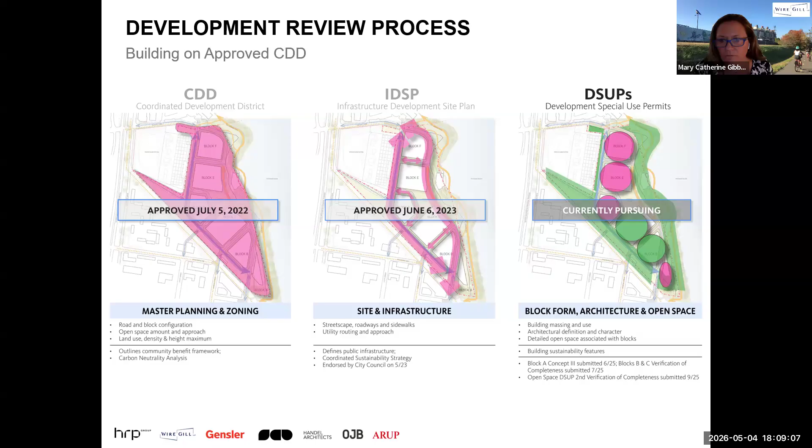The CDD concept plan created a framework for the redevelopment while preserving a certain level of flexibility and requiring certain on-site public improvements to be delivered depending on the phasing of the redevelopment. The CDD identified what comes with which — what we used to call phases, but we now group by blocks — particularly what open space comes with which block.

HRP is applying the CDD framework in the first blocks of this development. They're proposing to build the first 2 blocks, blocks B and C, and the open spaces — the waterfront open space and the rail corridor open space — tied to those blocks. The remainder of the development will come later. Now I'm going to turn this over to Melissa Schrock of the HRP Group.

Thanks, Mary Catherine. Good evening, everybody. We're so excited that so many of our neighbors have joined us this evening to get the update. I'm Melissa Schrock, and I lead the mixed-use development team at HRP.

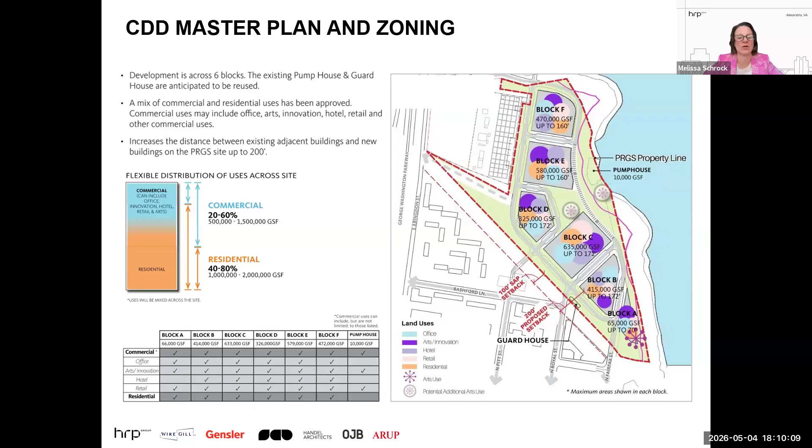Corey, you can go to the next slide, please. As many of you may know, HRP specializes in remediating and reinvigorating former industrial sites across the country, like this one here in Alexandria. PRGS is actually the 5th coal-fired power plant that we will remediate, deconstruct, and transform. At PRGS, we'll be transforming the site into a welcoming waterfront district with a dynamic mix of uses that include housing and commercial, retail, arts and cultural space, pedestrian and bicycle connections, and significant open space for the community to enjoy.

During our CDD phase, as Mary Catherine just reviewed, we developed 4 guiding principles for this project through many conversations with community members, city staff, and local leaders. Those principles are: integrate the site, re-knitting it into the existing urban fabric of Alexandria; connect people to the waterfront, removing the barrier that the power plant has been in this section of the waterfront for so many years; provide meaningful open space, which you'll hear a lot about this evening; and create a sustainable new place, which we'll touch on as well. Next, please.

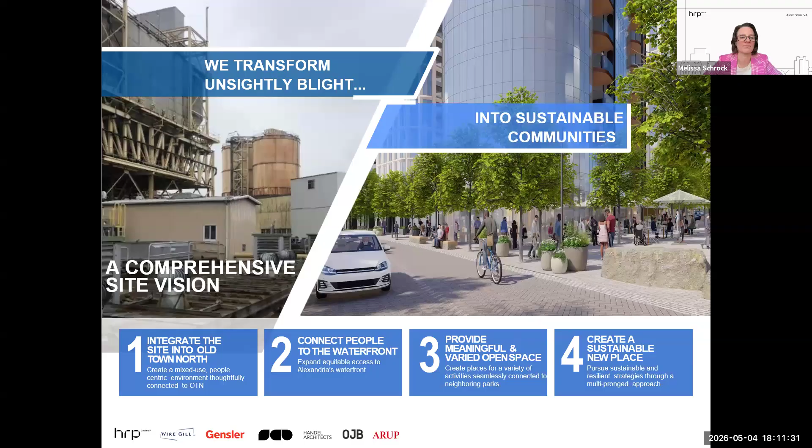HRP is really grateful for the years of advocacy from the community that led to the shuttering of the power plant, allowing us to acquire it with a vision to transform it from a fossil fuel-based facility into a sustainable new district. As documented in our approved Coordinated Sustainability Strategy, or CSS, which was the first of its kind in the city, the project will include important resiliency improvements for stormwater management and on-site energy generation, as well as the creation of a significant number of construction and permanent jobs. Next.

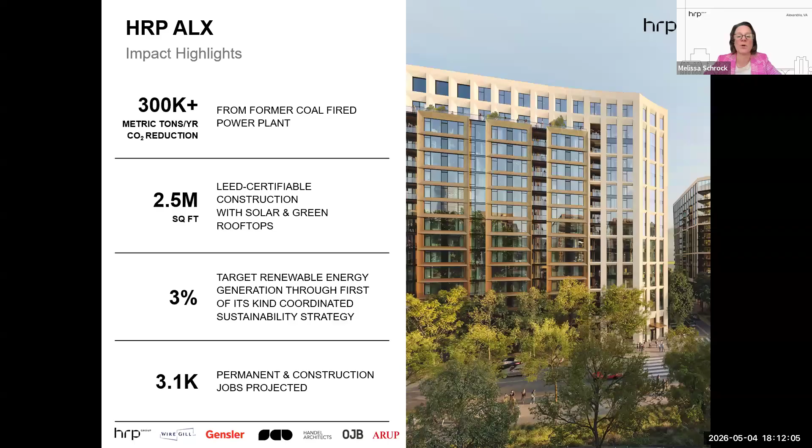Additionally, this project is unique, both in terms of some of the challenges of redeveloping a site like this, as well as the public benefits it's able to deliver. We'll be undertaking the abatement and deconstruction of the plant itself and environmental remediation of the site to enable redevelopment, and that's going to start as soon as next year.

Significant affordable housing units will be provided on site. Over 10 acres of public open space will be created or improved. And of course, new roadway, utility, bicycle, pedestrian, and bus infrastructure will be built as part of the project. Over a period of about 30 years, the project is anticipated to generate about $770 million in new tax revenue for the city. And all told, this project represents about a $2 billion private investment into the site.

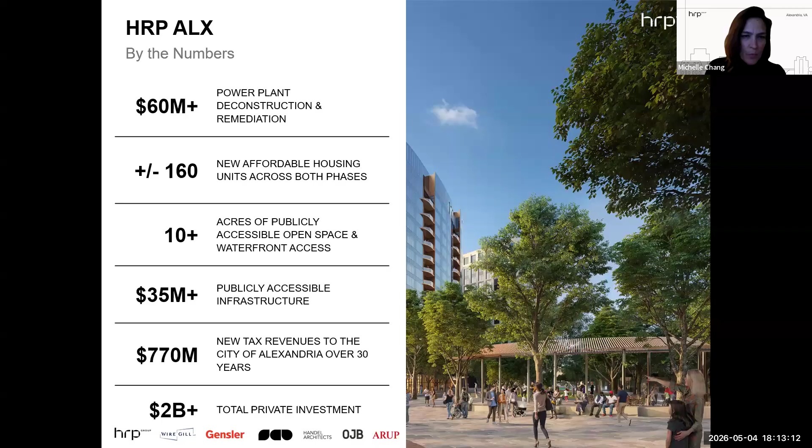HRP's approach for incorporating affordable housing across this redevelopment is delivered through three key components. The first are the set-aside units, which ensure the affordable units are incorporated across residential buildings throughout the new development. Secondarily, a voluntary contribution, which ranges based on the product mix across the site, a range of 8 to 11 million in 2022 dollars. This will be paid by block and will help fund affordable housing initiatives, which includes our third key component, a unique, dedicated affordable housing building that will be developed using an innovative public-private partnership approach with the city and a future affordable housing partner.

This will be constructed in phase 2 and leverage multiple affordable housing financing sources. HRP is proud to create housing opportunities for individuals and families across a range of income levels as part of this transformational redevelopment.

Next slide. Building on the rich culture of Old Town and Old Town North neighborhoods, the project will establish a vibrant arts and cultural district that celebrates both the history and future of these neighborhoods in multiple ways. First, through the creation of 30,000 square feet of dedicated cultural space, half of which will be subsidized through the Arts Bonus Density Program. Second, the new district will be the northern terminus of the Arts and Cultural Corridor that extends from the Torpedo Factory and links Old Town and Old Town North.

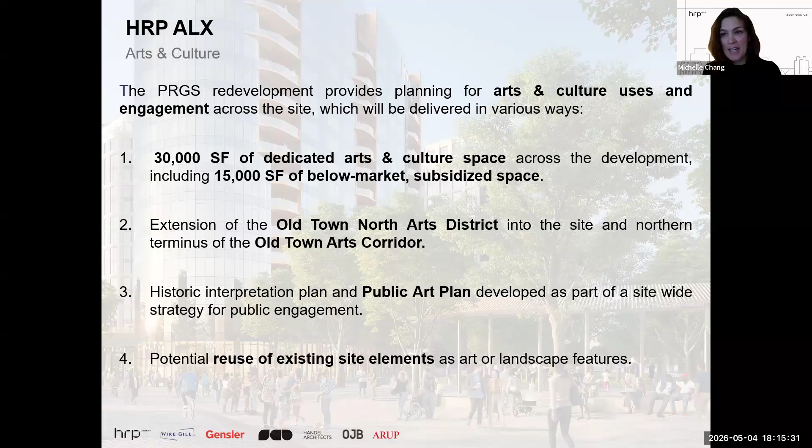We are so fortunate to be working with a world-class design team. Our architects, Gensler, Handel, and SCB, along with our landscape architect, OJB, are collaborating closely to bring this vision to life with the highest standards of design and placemaking. You'll hear directly from several members of the design team tonight, and we also have additional consultants on the call who can help and answer any questions that might come up.

As mentioned earlier, we have submitted 4 development special use permits for the first phase of the project: blocks B and C and the waterfront and rail corridor open spaces. These applications are scheduled to go before the Planning Commission and City Council in June.

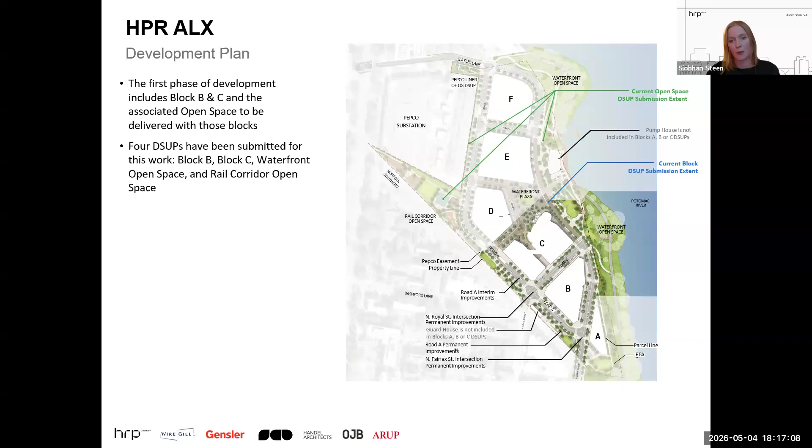This site will be developed from south to north, beginning with blocks B and C. Throughout the DSUP process, we've continued to refine the phasing plan in coordination with city staff. As shown here, each development block will be delivered together with its open space adjacent, ensuring that public amenities come online as the neighborhood grows.

Zooming in on this first phase, blocks B and C are located at the southern end of the site closest to Old Town North. In this image, the Potomac River is at the top of the frame, and the waterfront open space creates a continuous landscape from the river's edge and the Mount Vernon Trail, connecting to the new streets and sidewalks on site. Access to these blocks will be provided through the extension of North Fairfax Street into the site, along with the new Road A, which runs from this intersection at North Fairfax all the way to Slater's Lane.

Blocks B and C are mixed-use sites. Each parcel includes an active ground floor retail, a for-sale condominium building, and a rental apartment building. You'll be hearing more shortly about the architectural and landscape design for each of these components. Next, please.

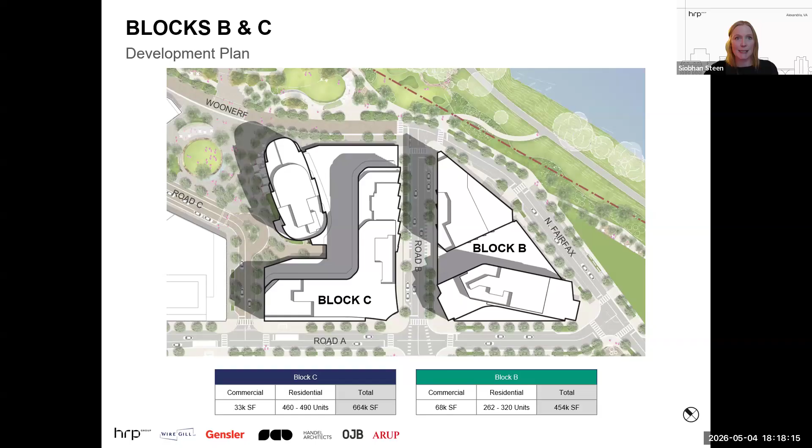In addition to our commitment to high-quality design, the CDD Master Plan established Alexandria's first coordinated sustainability strategy, or CSS. This strategy outlines a series of green features that will be incorporated throughout the site, including a minimum LEED Silver certification for all buildings, on-site renewable energy through rooftop solar panels, water conservation measures such as low-flow fixtures, and full electrification of all building mechanical systems. These commitments reflect HRP's dedication to environmental stewardship and long-term resilience.

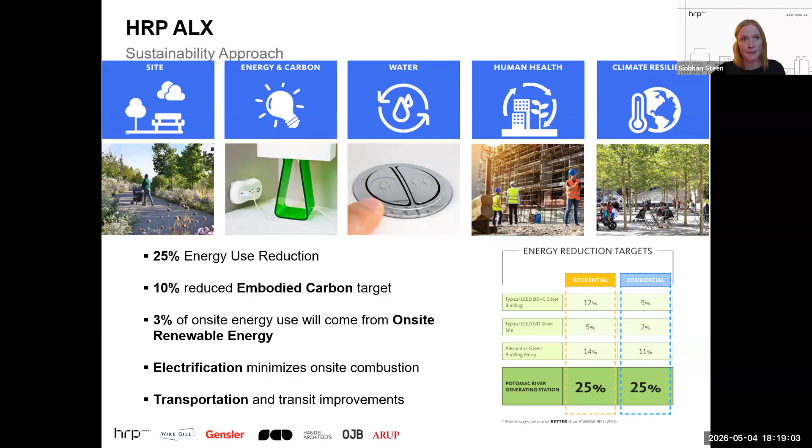Thanks, Siobhan. Good evening, everyone, and thank you for being here tonight. My name is Simon Beer. I'm a landscape architect working on the Potomac River Generating Station project here in Alexandria.

Tonight, I want to walk you through what I believe is the most exciting component of the entire project, and that's the open space. What we are proposing here is not just a collection of open space, it's really an integrated network of green spaces, trails, public amenities that will fundamentally reconnect Old Town North to the Potomac River.

We're going to be covering the overall open space vision and walk you through the waterfront plan from south to north, and then move into the rail corridor open space and touch on our historic interpretation and art strategies before we wrap up. Next slide.

So to put this into context, we will start with the big picture, and this slide shows the open space network that we are proposing along with existing parks Alexandria residents already know and love. The PRGS project will contribute approximately 11 acres of combined open space, some of that being off-site and some on-site. And when you compare that to parks like Founders Park at 4.8 or Oronoco at 5.6, you can start to appreciate the scale of what we're talking about here.

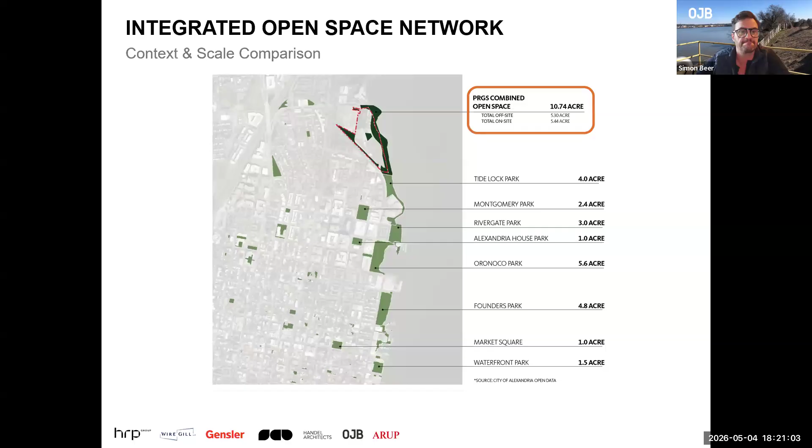Our team has been working collaboratively with the National Park Service to ensure that we are designing this as a natural extension of that landscape with no jarring transitions or hard edges. So the goal from a landscape architecture standpoint is to create a green connection along the perimeter of the development, something that will orient people, provide ecological value through native plantings and stormwater management, and gives the community a real genuine sense of place. Next slide.

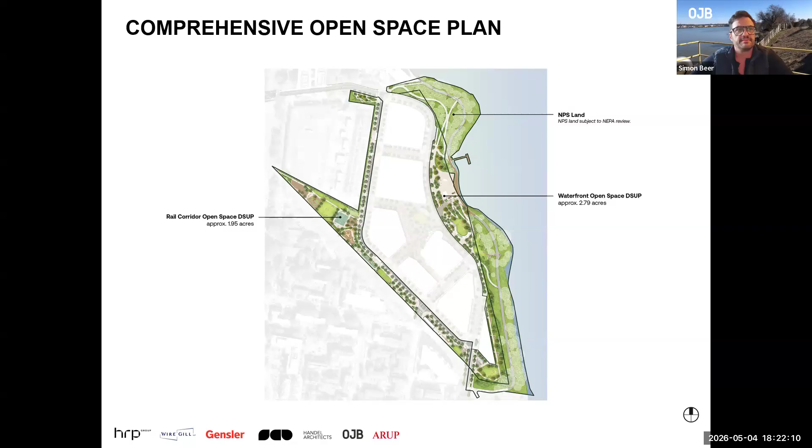So the waterfront open space is organized into 3 zones, a north, central, and south waterfront. And each has their own character and program. This was an important design strategy for us. Rather than one undifferentiated park experience, we're creating a sequence, a landscape journey, where each zone offers something distinct as you move along the water's edge. When you think of a good urban street, it has rhythm, it has variety, moments of energy, and moments of calm. That's what we're thinking about for the waterfront park along the Potomac. Next slide.

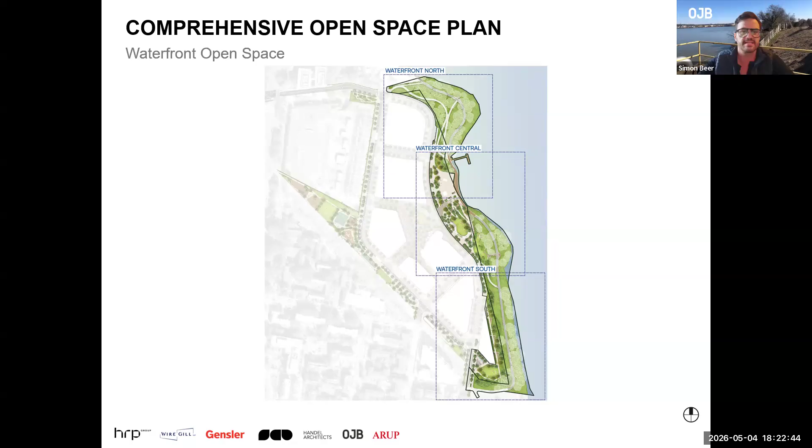So starting at the south of the waterfront, this is an entry point to experience from the south end of the site. The features include a generous pedestrian walkway along the water. Alongside that, an event lawn that can host movies. There's also a water feature that serves as a welcoming landmark, integrated seating throughout the landscape, and connections to the Mount Vernon Trail, which is one of the most heavily used multi-use trails in the entire region. From an urban design perspective, that is about creating a memorable front door to the waterfront and a kind of civic open space that invites people to linger and enjoy the space. Next slide.

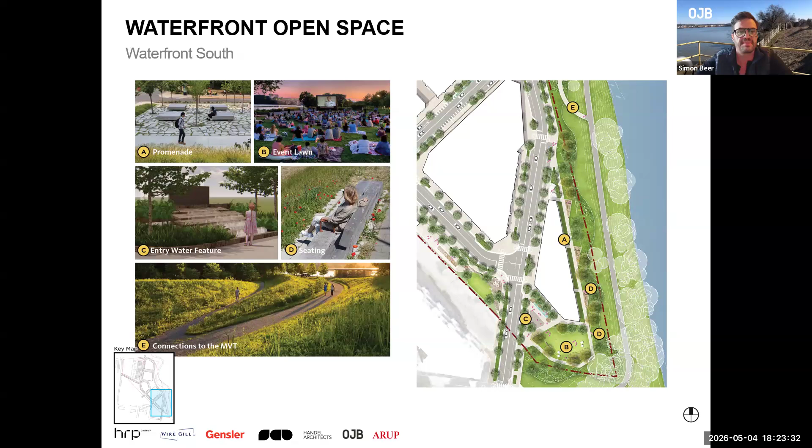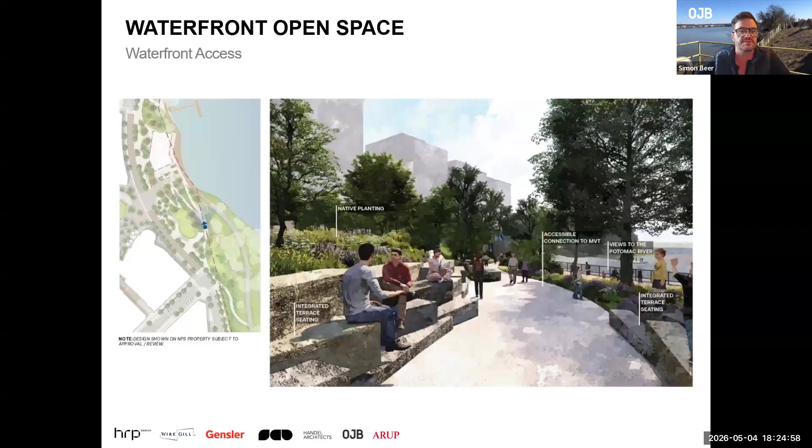Next slide. The central waterfront is the heart of the waterfront experience. This zone includes six key program elements, including the Mount Vernon Trail bridge replacement, pump house, public viewpoint, native gardens, an accessible walkway down to the water, a shade structure with swings, and the Great Lawn.

The existing pump house is a historically significant structure on this site, and rather than demolishing it, we are proposing to activate it as a public amenity, a viewpoint with potential for food and retail, also along this water's edge. So this adaptive reuse at its best is honoring the industrial heritage of the site, while also giving it new life. Next slide.

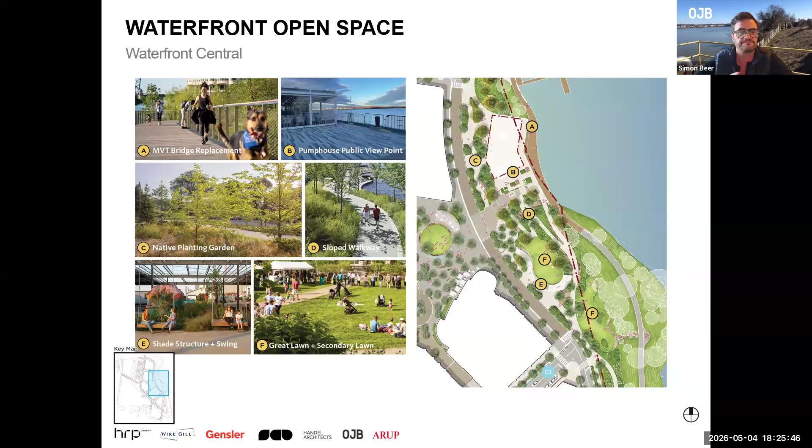The Great Lawn is the centerpiece of the central waterfront. When you look at this rendering, I want you to imagine on a Saturday, families, dogs, cyclists coming off the Mount Vernon Trail, food vendors, perhaps a concert on the raised stage. This is the kind of activated public space that defines these great waterfronts.

The design includes flexible seating, the stage and overlook, and swings. These elements are both functional and playful. The lawn itself is sized to accommodate a large community event while remaining intimate enough for everyday use. And of course, views out to the Potomac are preserved throughout. Next slide.

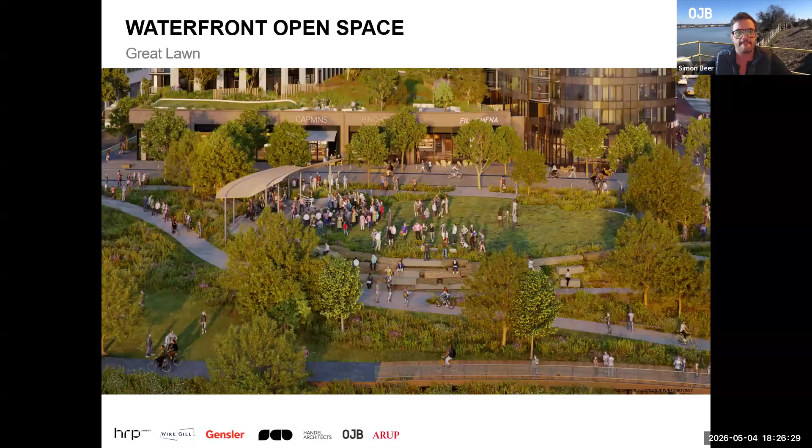Here you can see the shade structure in a little bit more detail, a contemporary canopy that provides shelter and a gathering spot adjacent to the Great Lawn.

The stone block terraces along the water's edge frame views and create additional informal seating zones. These kind of structures are really critical in public open space. Shade and shelter extend the usability of that outdoor space throughout the year and create a more comfortable destination rather than just a place to pass through.

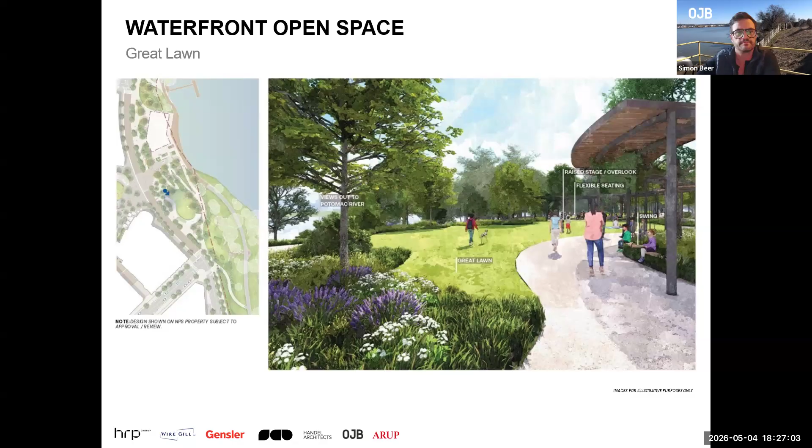Next slide. Accessibility is a core value of this project and certainly not an afterthought. The idea of the accessible pathway adjacent here, and the idea of the kind of informal shade structure that we are sitting next to, you can start to see the idea of the stone blocks as well. These kind of integrations are incredibly important.

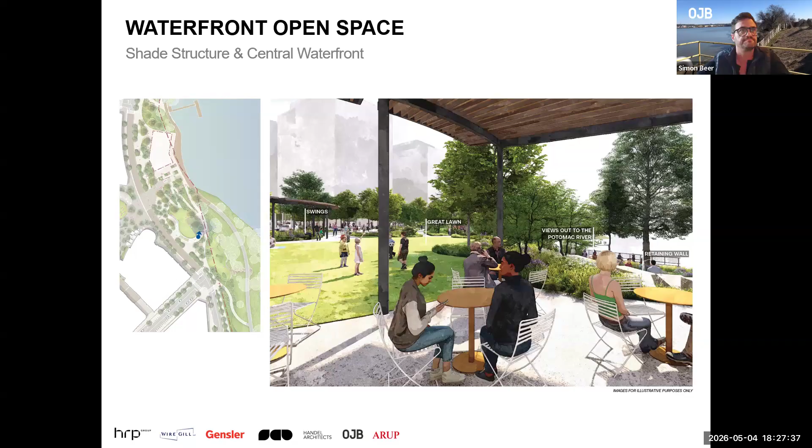Next slide. You can see this native planting along the pathway, that accessible connection to the Mount Vernon Trail, the integrated seating that works for everyone. Good design here makes accessibility invisible and just integrates it right in. And so that's really the intent here.

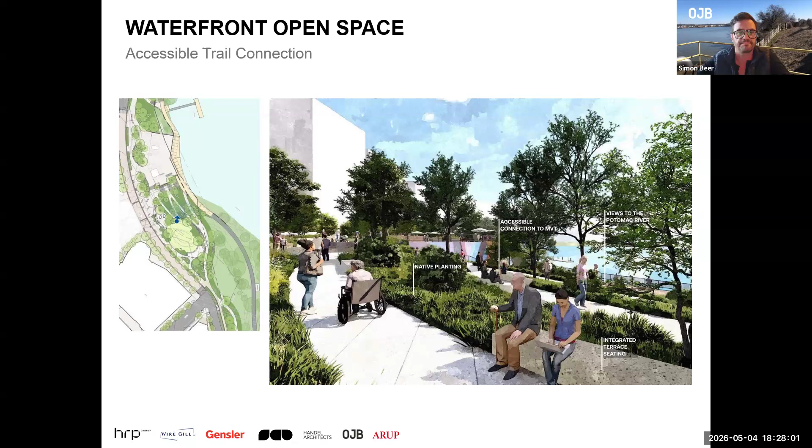Next slide. The Pump House Trail connection is a dynamic moment for the waterfront sequence. A cascading stair flanked by rich native planting, a bold mural on the pump house wall, creating a memorable moment.

You can see the design accommodating for both pedestrians on foot and wheelchair users, with the grade transition handled thoughtfully throughout. It's also that opportunity for public art along the architecture and the existing pump house, what would otherwise be a blank space, so adding some rich and public realm art opportunities.

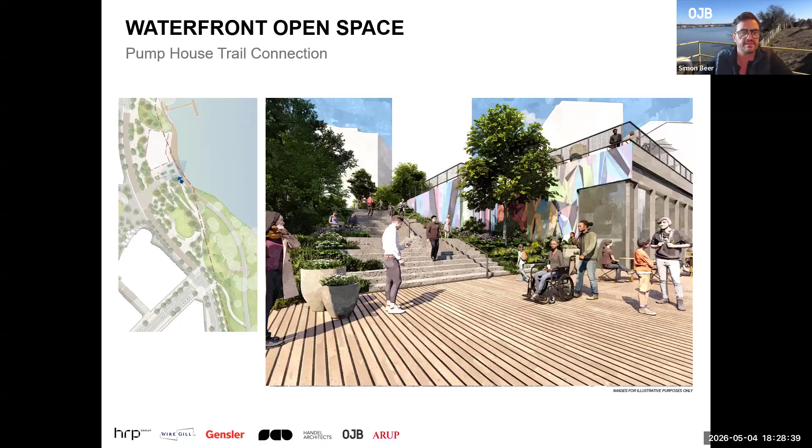Next slide. The Mount Vernon Trail is definitely one of Alexandria's greatest assets, and this project represents a significant opportunity to enhance that. At the pump house, we are proposing a generous expansion of the trail with the boardwalk along the water's edge, outdoor seating, areas for cyclists, and improved connectivity for pedestrians and cyclists.

We're designing this in conjunction with the National Park Service and subject to their approval and review process, but are committed to working collaboratively with them to realize this vision.

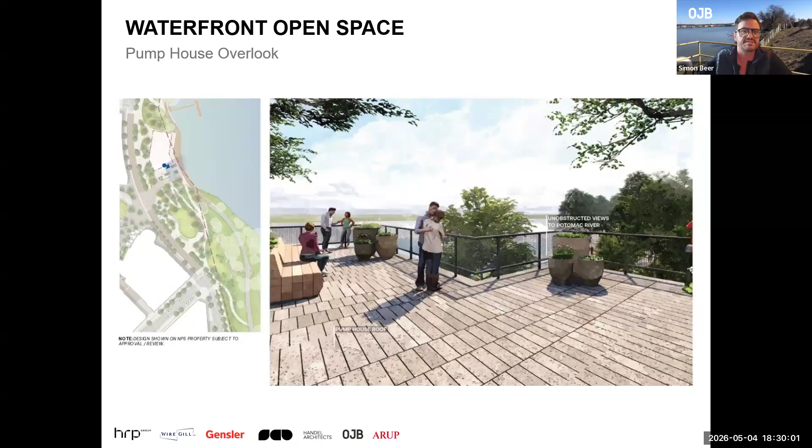Moving to the waterfront north, the character of the landscape shifts a little bit. Here we're in a wooded peninsula of NPS land, and the design takes on more of a naturalistic quality, tree canopy, connections to the Mount Vernon Trail, and something that's really exciting, a personal non-motorized watercraft launch.

That launch itself would open up the Potomac in a new way for Alexandria residents. Just imagine launching your kayak from this site and paddling down to Old Town. That's the kind of amenity that transforms how a community relates back to its waterfront, and a big purpose of this waterfront open space.

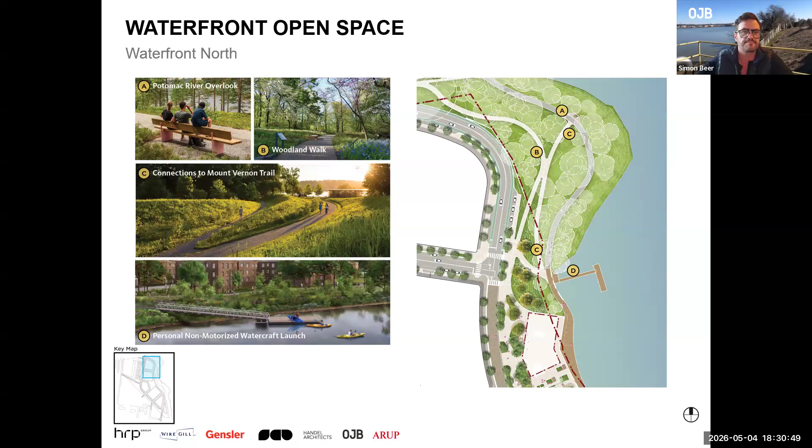This rendering shows the Mount Vernon connection, a minimum of 12-foot wide boardwalk, and a stair that comes down from the development to that personal watercraft launch. The design is clean and functional, prioritizing movement while maintaining water views. This infrastructure investment will pay dividends for decades in terms of how people can access and enjoy that waterfront.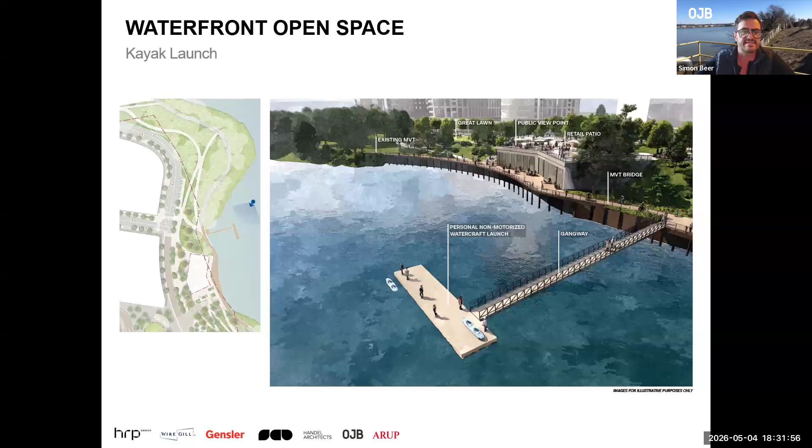So we're going to shift our view to the other major open space system, the rail corridor open space. This linear park runs diagonally through the interior of the site, organized into three zones: north, central, and south, plus a stretch called the Pepco liner adjacent to the existing utility infrastructure.

Rail corridor parks have become a hallmark of thoughtful design in many different places, like the High Line in New York or the Atlanta Beltline. The idea is to take underutilized industrial land and transform it into vibrant, connected open space, and that's exactly what we're doing here.

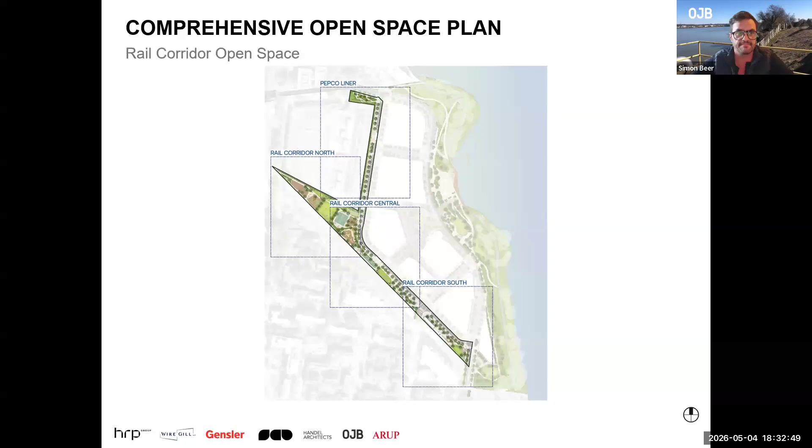So next, we're going to talk about the southern area, and that rail corridor south is the gateway into the rail corridor from the southern end of the site.

Key elements of this include a repurposed guardhouse, an existing piece that's there today, one of the historic structures on this site. It's going to anchor this open space, along with a game court for activities like ping pong and bocce, a flexible lawn for informal recreation, and a gateway plaza that marks the entry into the development. The adaptive reuse of the guardhouse is particularly meaningful, as it's a tangible link to the industrial heritage of the site, while making a great community amenity within this section of the rail corridor park.

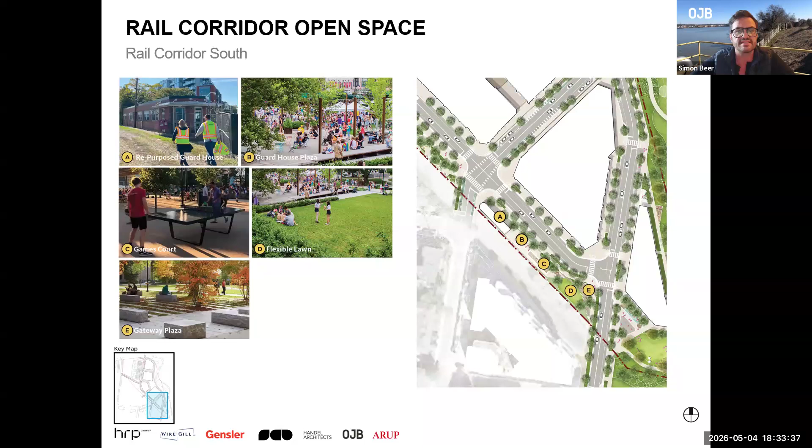So this is really what we're thinking of: placemaking and creating a space with genuine identity, something that has character, that reflects where it came from. The industrial aesthetic of the materials, the art, and the preserved structures all work together to tell the site's story.

The guardhouse plaza takes on a little bit more of an intimate European plaza character, with a canopy of trees, string lights overhead, and movable seating that allows the space to flex for different uses and games. It will really be a great amenity to the community—think of a space that works great on a Tuesday afternoon as well as it does on a Saturday evening. Movable seating is really an important design choice here, allowing people to make the space their own, and that kind of adaptability is really what makes a public space great.

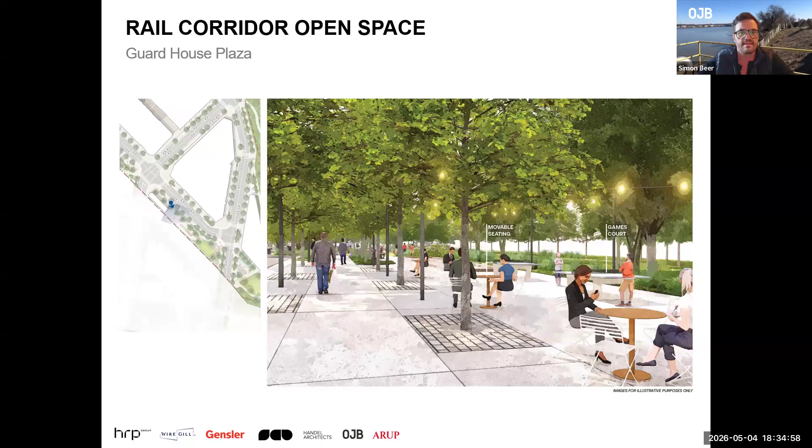The central rail corridor introduces family-oriented programming. Here you have a sensory garden, a passive lawn, and the centerpiece of this zone, the kids' play area, which includes a water feature, a tot lot, and a larger play structure.

In our design process with HRP, we have been talking about design for all ages and all abilities. The sensory garden serves young children with some sensory sensitivities, the passive lawn serves adults and teenagers, and the play areas serve families with kids. When the park works for everyone, it really becomes a true community space.

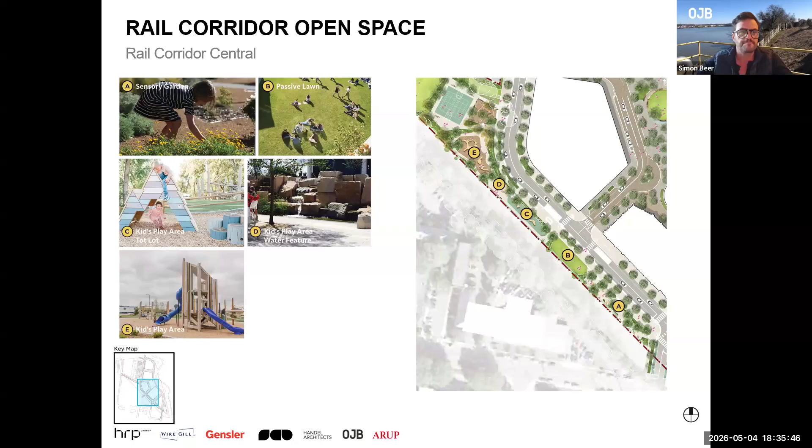The kids' play area is designed to be a genuine destination, not just a standard playground, but something that's engaging, imaginative, and encourages exploration. You can see natural play elements, a water feature with interactive stones, a large play tower beyond with a slide, and even a scooter track.

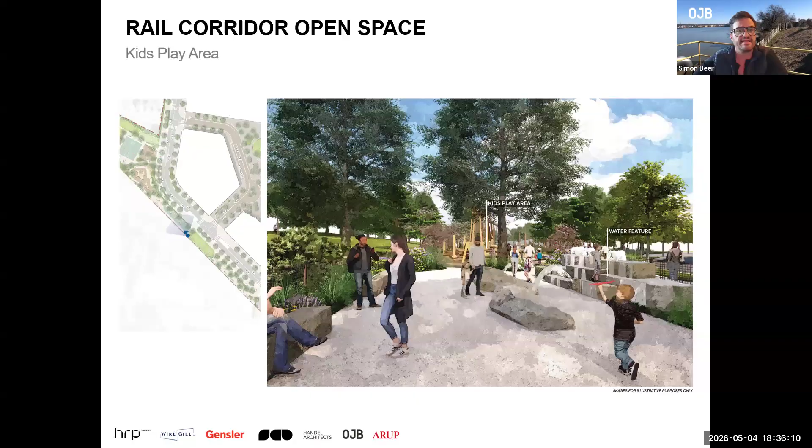The design is going to use natural materials, timber, stone, and gravel, along with safety surfacing that connects kids back to nature within this urban setting. Research is consistently showing us that children benefit immensely from this access to nature-inspired play, and this design delivers on that in accessibility, safety, and excitement.

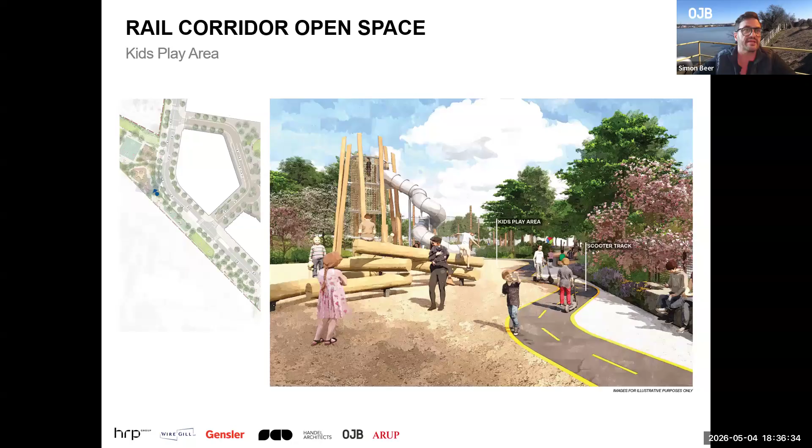The rail corridor north is the most active zone of the rail corridor, designed for sports, fitness, and recreation. The program includes a seating grove, sports courts for basketball and pickleball, fitness stations, a recreation lawn large enough for soccer or other sports, and a dog park.

From an urban planning standpoint, the mix of active uses here within the northern section makes sense, set back from residential portions of the site, while also making this easily accessible to the broader neighborhood. A dog park and sports courts are consistently among the most requested amenities in the community, especially through our community input process, and we've certainly prioritized both here.

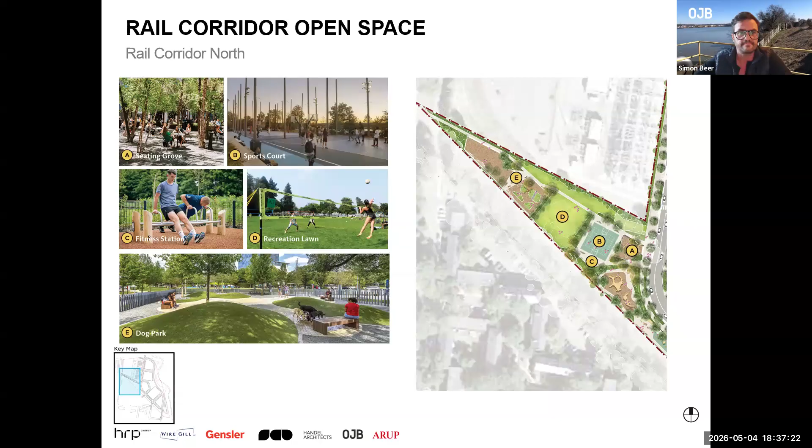The sports court is designed for multi-use. You can see the pickleball lines and basketball lines, allowing it to serve different user groups at different times. We include a generous entry with perimeter netting and tree planting providing shade along the edges. The multi-sports courts are a smart investment for the public space that maximizes the value of the footprint while ensuring the space stays active for all.

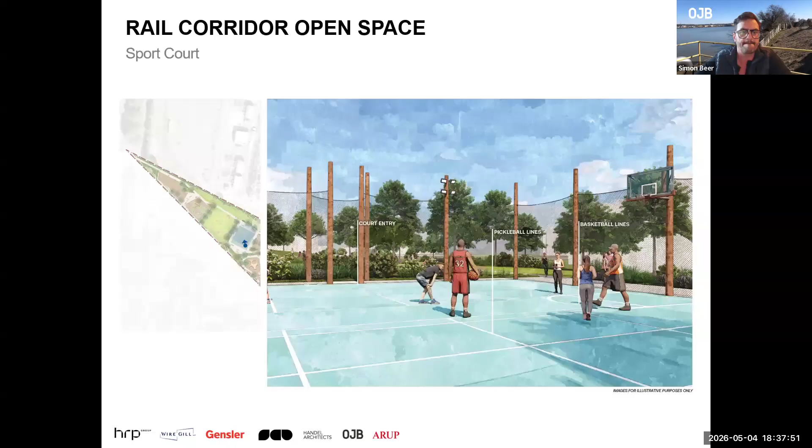The recreational lawn gives you a sense of how all the pieces come together in this rendering. You can see the sports courts to the left, the kids play area in the background, and this open lawn in the foreground with the soccer goal. The tree canopy frames the spaces and creates a sense of enclosure without feeling confined. This is a design technique we've been using, and it's really intentional here along the edge of this field.

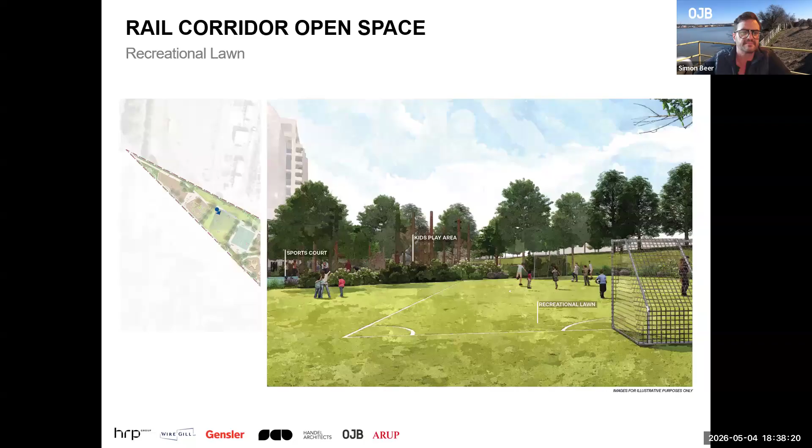The dog park deserves its own mention because it goes well beyond just a regular fenced enclosure. You can see mounds, a dog tunnel, and reclaimed wood climbing features within the confined space. The space is designed both for dogs and their owners, with topography featuring engagement for dogs and additional seating areas along the perimeter for their owners. It's a small detail, but it reflects the broader philosophy of the design team and HRP, where every element of this open space is designed with care and intention, as implemented here within this rendering.

Mentioning the Pepco liner, it's really an open space that runs along this existing utility infrastructure, demonstrating that it can become an opportunity as well. Rather than treating the substation as something to hide, we're using native plantings and artistic screening along this, and also creating a flexible gathering space to the north. The linear strip of green is going to complete an open space loop around the development, ensuring that pedestrians can circulate around the entire site through connected green space. That kind of connectivity is fundamental to the urban design qualities here of the entire development.

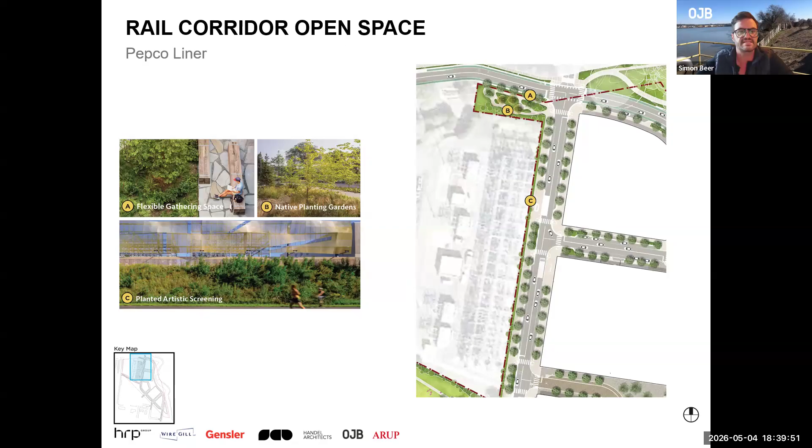Before I close, I wanted to briefly touch on our historic interpretation plan because it fundamentally has shaped how we have approached the design of all the spaces. The site has a rich and complex history, from indigenous occupation before European contact to the founding of Alexandria in 1749. This now industrial area has found abandonment and the growth of invasives that have really marked the beginning of the site's current condition. Good urban design doesn't erase history, it reveals it. Our goal is to embed that story into the site and into the physical fabric of the open space through materials, structures, and art.

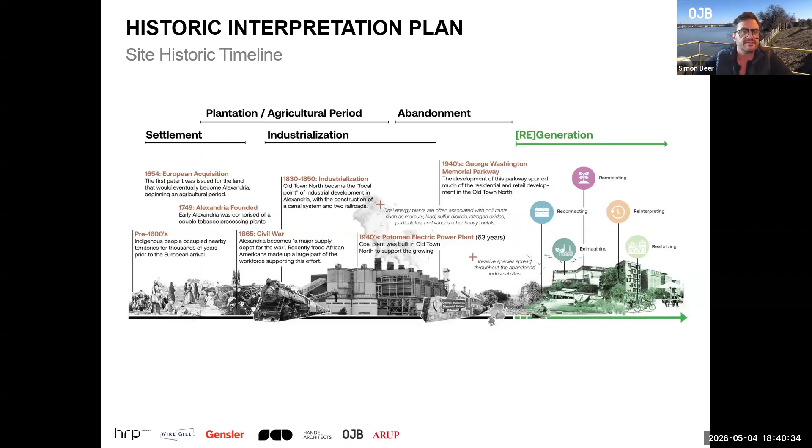Across the site, we have identified specific locations and opportunities for interpretation. That includes repurposing structures like the guardhouse and pump house, educational signage, and the reuse of industrial relics, as well as art pieces throughout, thinking about textures, words, and forms to inform the interpretation of the history here on site.

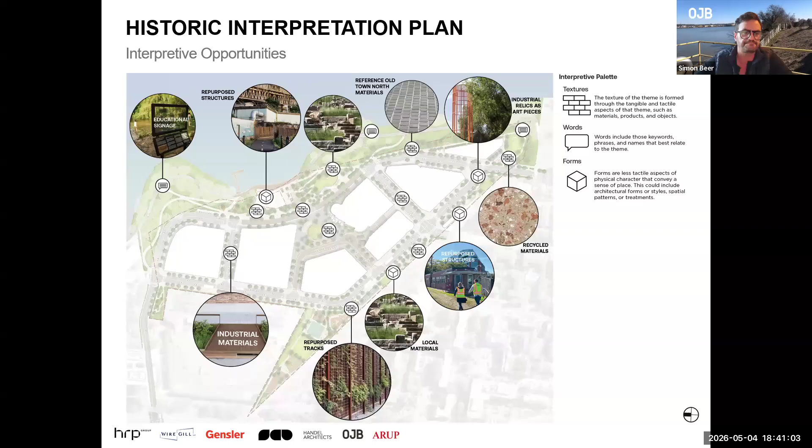Next is the art plan. Public art will be woven throughout the open space at several different locations, reflecting the history and character of the site. This includes things like the Pepco screen, the Central Plaza sculpture, pump house murals, and stone features that reflect the natural setting along the Potomac River. There will be several more meetings on this.

We're treating art not as decoration, but as a civic commitment to Alexandria. It has been such a pleasure to walk through some of these design ideas and thinking with you. And with that, I'll pass it along.

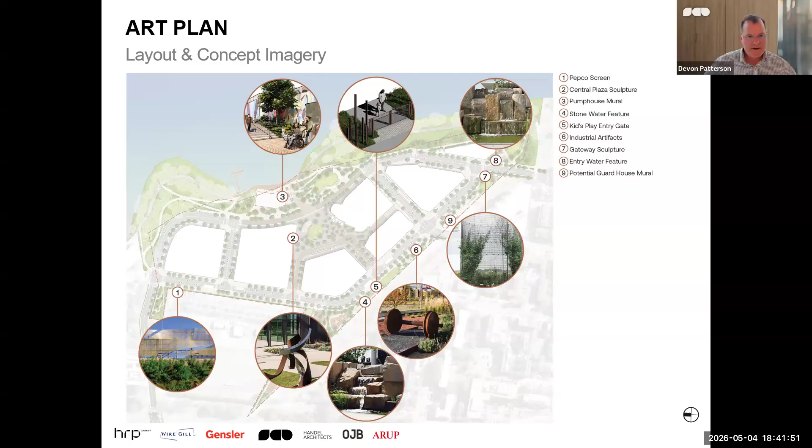We're excited to walk you through the progress on the Block B design, which is a key site shaping the future of the district. Over the past year, our team has been working through phase one of the redevelopment. Block B plays a central role in creating a vibrant, walkable, and welcoming environment for residents, visitors, and the broader community. Block B is designed around strong pedestrian connections and active street edges.

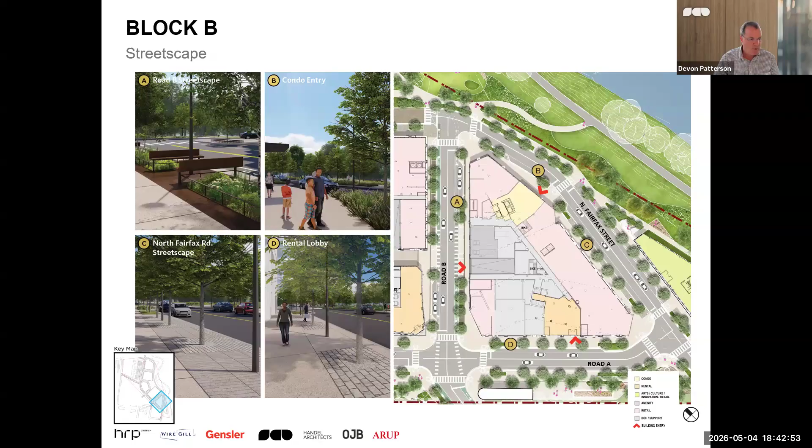Along North Fairfax, the streetscape emphasizes outdoor cafes and connections to the public green space along the Potomac. We've located retail, residential entrances, and public-facing uses to create a lively rhythm similar to what people experience in Old Town on Fairfax. Both Road A and B will serve as key connectors with building entrances and retail placed to support natural pedestrian flow.

At the intersection of North Fairfax and the gateway is the entrance to the district. Block B introduces a signature corner. This area is designed to feel welcoming and recognizable. The retail, storefront signage, and architectural detailing help establish a sense of arrival to this active district.

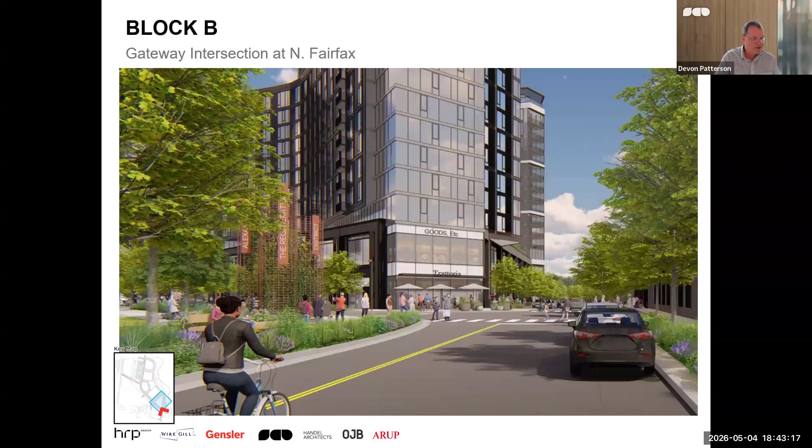Along North Fairfax, Block B includes retail spaces that support diverse neighborhood-serving businesses. The condominium entry and rental lobby are each designed to be visible and provide safe access to the buildings, with thoughtful placement of entries to support foot traffic and enhance the public realm.

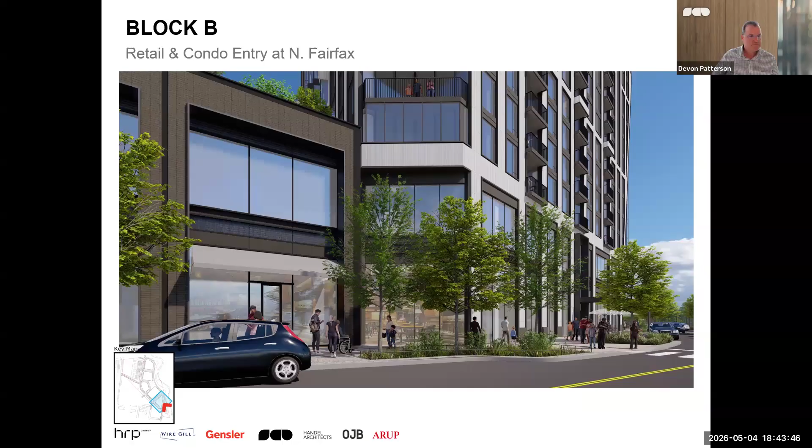As Block B comes to the ground, we've pulled back the elements there to create even more outdoor pedestrian space for the residents of the neighborhood.

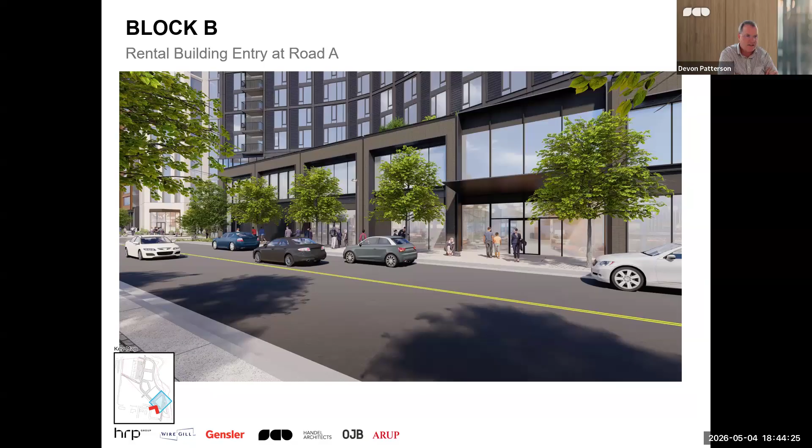This is the entrance to the rental building. From the rail corridor, we've focused on the rental itself and the entrance to the lobby, which is designed to be visible and provide safe access.

Looking at the rental design of Block B from across the rail corridor toward the rental building, this is the south-facing building. We've created variation in facade expression to avoid monotony. Height variety was used to break up the massing of the facade, with the highest point on the right-hand side dropping to the lowest point on the left. This also creates a gateway element where the building meets the ground, forming a strong anchor to both intersections coming into the site. Retail spaces have been proportioned and inspired by Old Town's historic rhythms, with a mix of storefronts enriching the entire street experience.

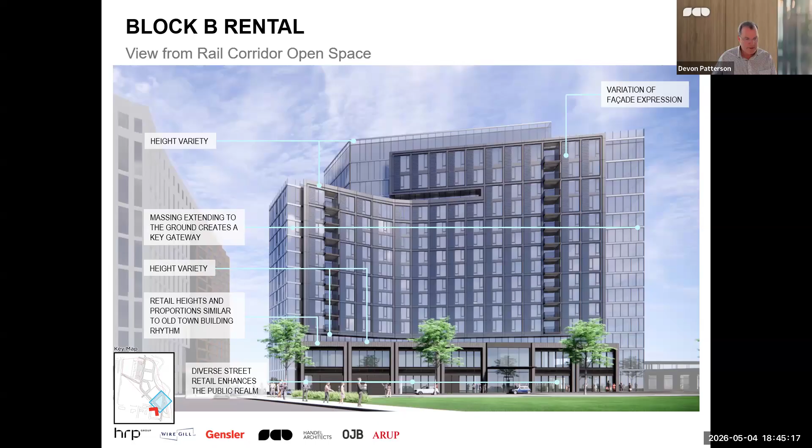Looking at the condo building from the waterfront, the building emphasizes the architectural excitement of the site. We wanted to create a dynamic, iconic sloping building at the corner with a rich material palette and vertical articulation to create height at the corner. We also created height variation for visual interest. The tower sets back and opens up the public realm at the ground floor, improving pedestrian circulation and comfort. The rooftop terrace that drops down from the corner becomes a signature feature and community asset, adding variation to the site. The retail spaces continue the Old Town character along the streets here as well.

In closing, Block B is designed to be a welcoming, walkable, and architecturally distinctive phase one of this district. It blends new development with familiar neighborhood patterns, strengthens public space, and creates opportunities for local businesses and residents. And with that, I turn it over to Blake to talk about Block C.

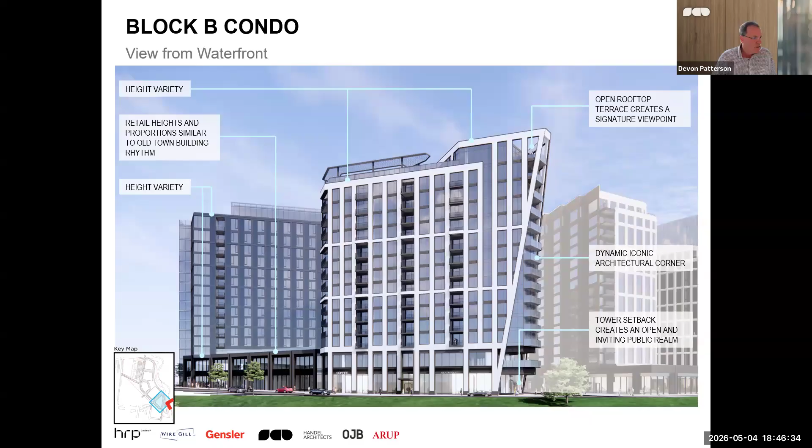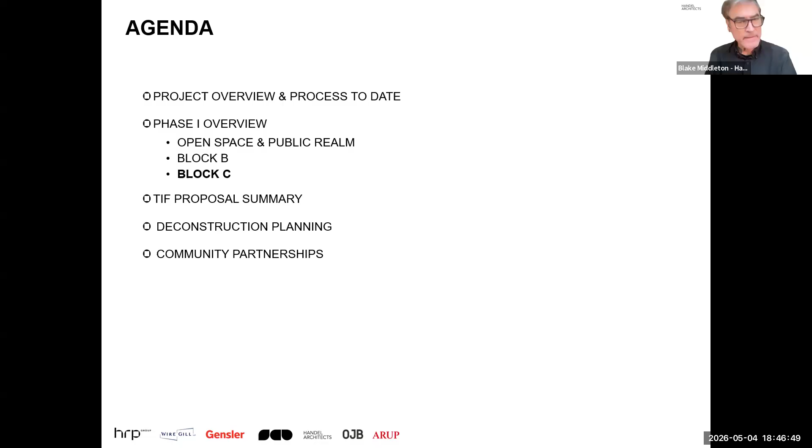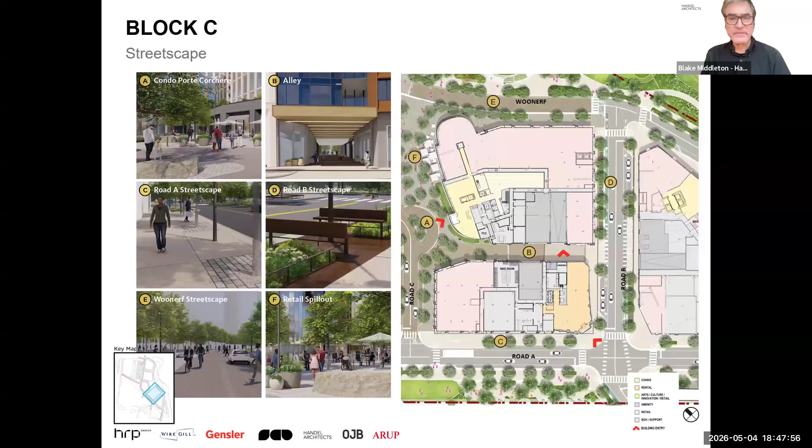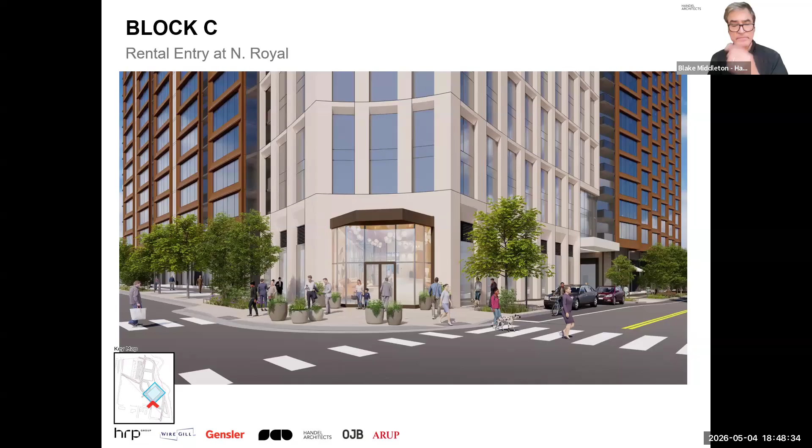As we move along the Woonerf, the all-glazed portion of the condominium tower begins to reveal itself. It's rotated a bit on an angle, anchoring itself strongly into the central square on the right, and begins to bend again.

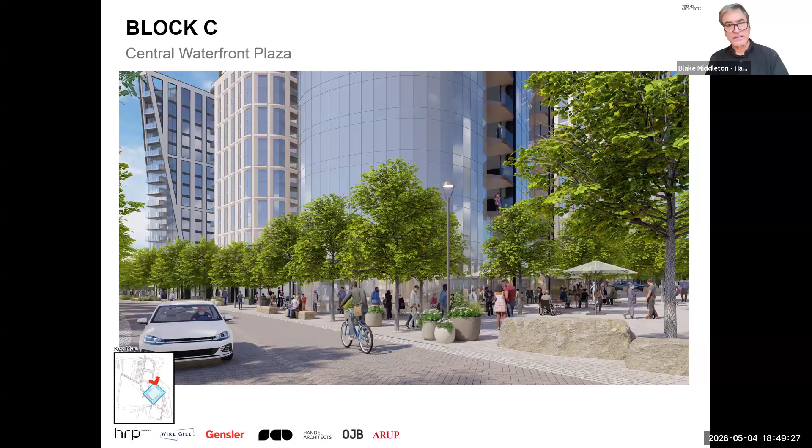One can imagine walking around the perimeter of the building, and we arrive at the condominium entrance, at a small plaza-like space which connects to that pedestrian connector visible in the distance on the right. All of that has retail space from the building lining that surface too.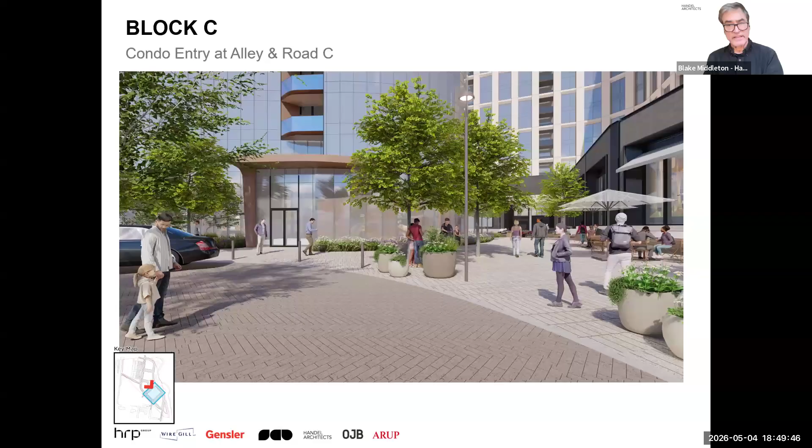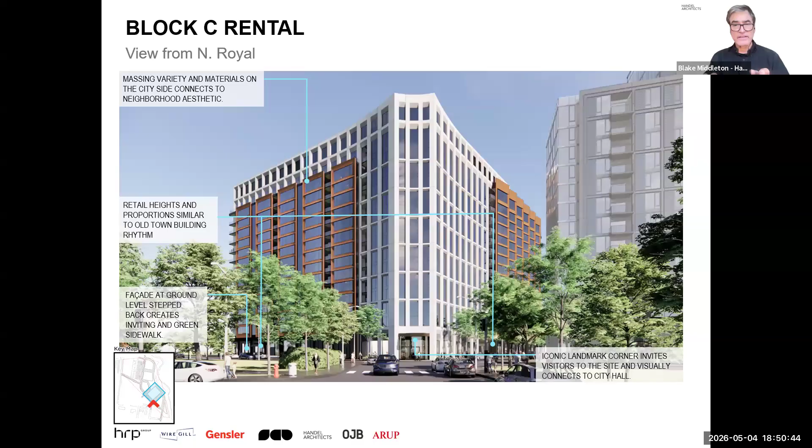In contrast to this L-shaped building facing south towards the old town, as you come around to the riverfront, the building begins to open up. The L-shape begins to capture and embrace the condominium tower, which has a much different facade articulation - a series of curvilinear, soft edges of continuous glass, opened up with terraces on both sides as it orients itself towards the city, towards Washington, towards the north.

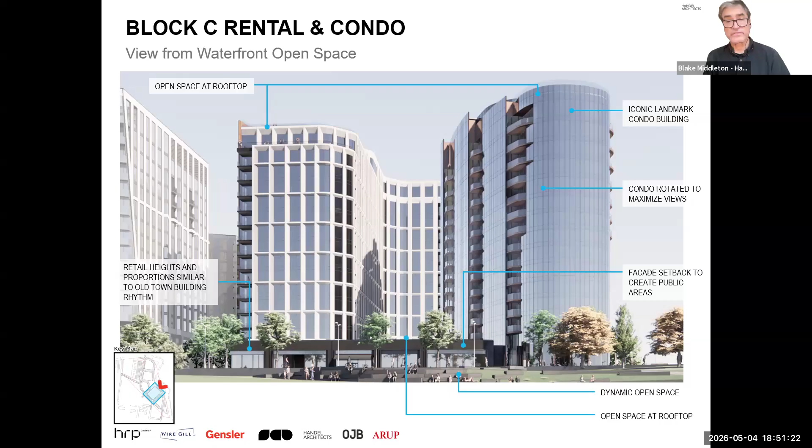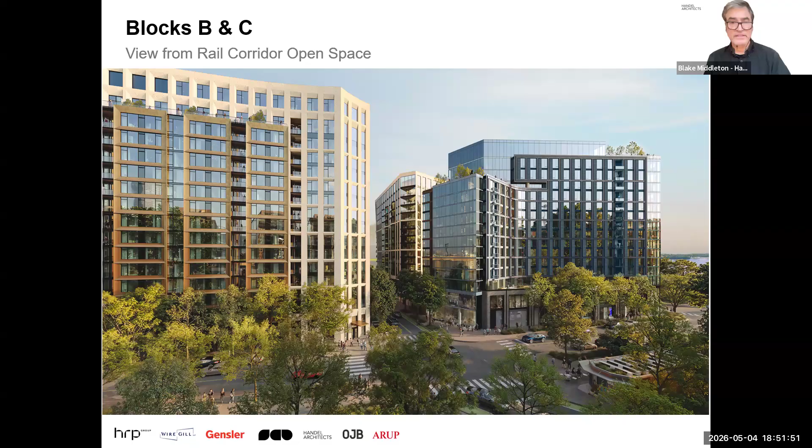Finally, standing back and looking at the composition of both buildings - Devin was describing this gateway moment that happens at Road B as North Royal comes up to that intersection, transitioning from the park in the foreground to the stepping up of scale on the buildings on both sides.

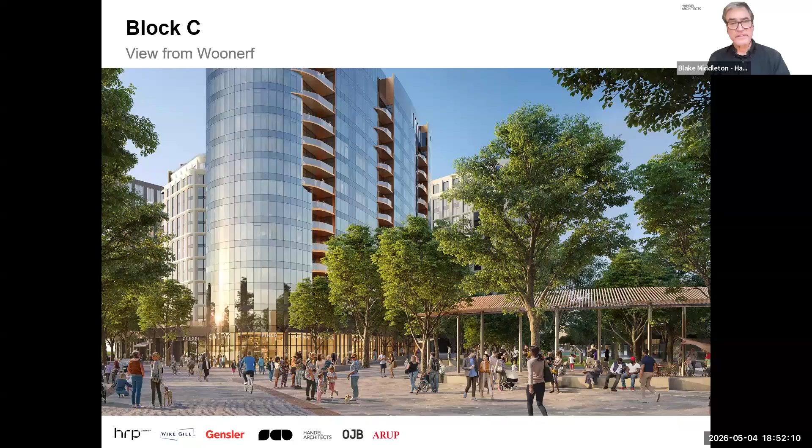And then a view from the Woonerf looking back towards the central waterfront plaza on the right, and the Woonerf on the left, and the condominium tower sort of anchoring itself into that plaza. And then finally, we can really get that transition Simon was talking about, between the riverfront edge sloping up towards the site and then transitioning to the podium levels, the pedestrian scale, and then stepping up to the larger city scale of the buildings beyond.

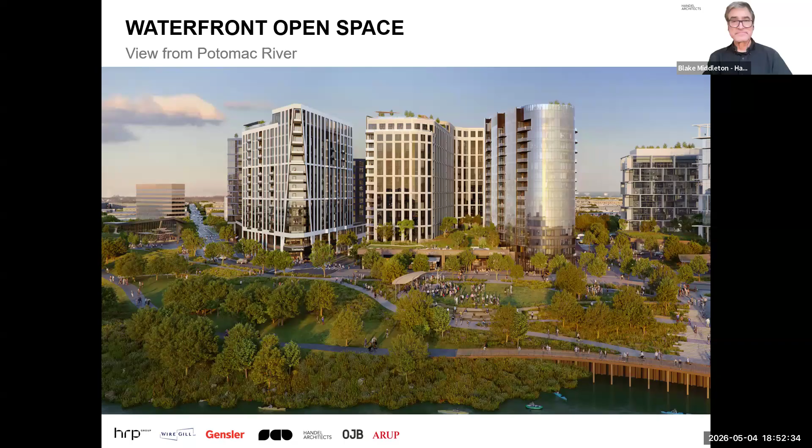In addition to advancing tonight's DSUPs for the first phase of development and all the open spaces you've just heard, we have been working with the city on a tax increment financing, or TIF, proposal to help unlock the project and move it forward. A TIF is an economic development tool that uses a portion of new future tax revenue generated by a project to fund the upfront costs of public infrastructure and other costs that enable the project. This future tax revenue would not exist but for the new development.

This project represents an estimated $2 billion of private investment into this site, and we've proposed entering into an agreement with the city to authorize a $135 million TIF in 2 phases, which represents roughly 6% of the total anticipated development cost. The power plant site is highly unique. It requires abatement and deconstruction of the existing plant, environmental remediation of the site, completely new roadway infrastructure, in addition to all the open space that will be created.

As it stands today, the site is really not generating any meaningful tax revenue for the city, but the new project is expected to produce approximately $770 million in new tax revenue for the city over the term of the TIF.

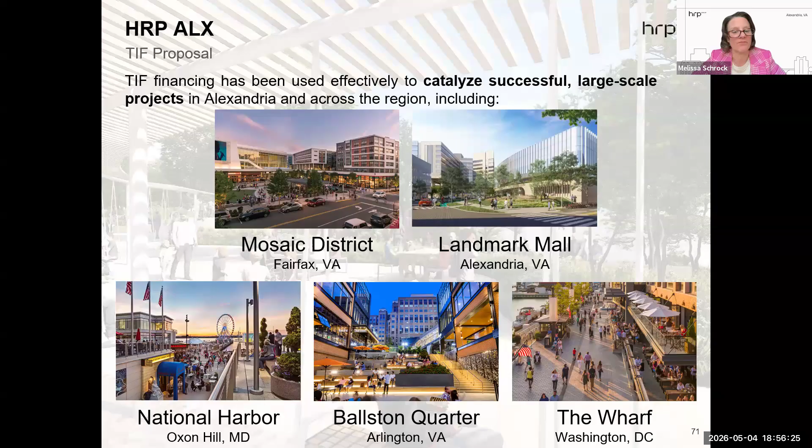Now I'm going to hand it over to John Newhall, who will talk about deconstruction. Thank you, Melissa. Hi everybody, I'm John Newhall. I head up construction here at HRP.

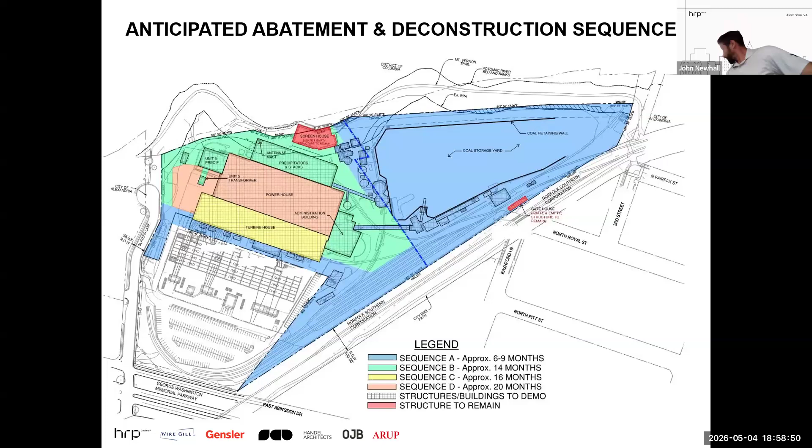First of all, one of the first things we'll do on site is set up a rodent control plan. That's done before we do any abatement or deconstruction work. Pretty straightforward process there. Both monitoring and bait stations are placed.

From a noise control standpoint, we will be abiding by all the local ordinances. We will be doing noise monitoring on site with our partner Balfour Beatty, both at the work site taking place, as well as working with city agencies if extended hours are needed, only when granted from them.

Next, vibration monitoring. This is going to be set up on the perimeter of the site and definitely adjacent to the Pepco switchyard. While this typically is sufficient, as this will be closest to the work actually taking place, we're also going to evaluate some foundation walls of potential adjacent buildings that we will monitor for this as well. The nice thing about this system is it provides real-time data to us, allowing us to adjust the work in the rare case that we do have an exceedance or getting close to threshold amounts.

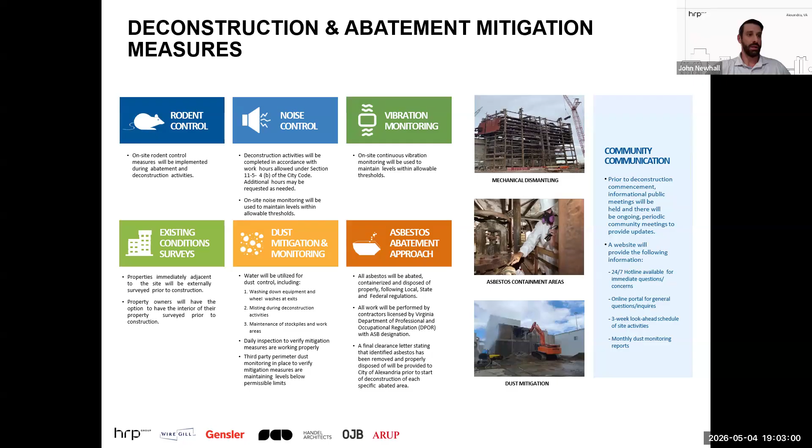And so finally, just prior to starting any of the deconstruction or earth disturbance, we've been working hand in hand with the City of Alexandria requirements. We've submitted 6 rounds of the infrastructure final site plan and comments back and forth. This includes demolition sequence by phase, dust mitigation plans, noise control plans, regulated material and handling and transport plans, a construction management plan identifying parking, queuing, roads, traffic routes in and out of the site, and a worker health and safety plan on site.

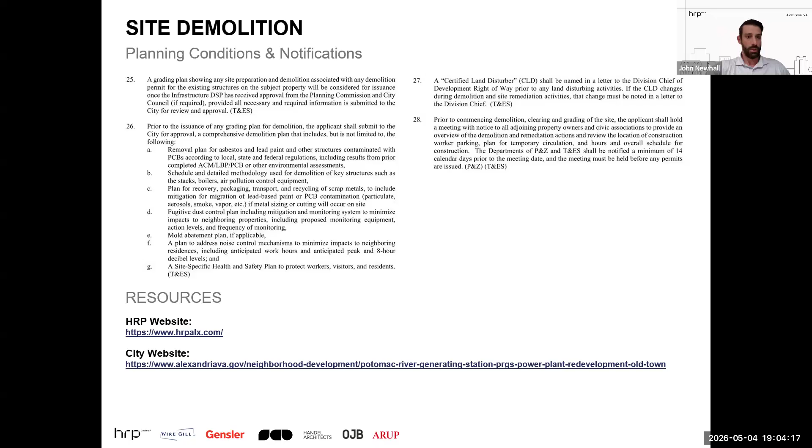As we get closer to deconstruction, we will be back in touch with much more specific deconstruction meetings identified. I'm going through things very quickly. We're targeting mid to late 2027 for deconstruction. As we get closer and into permitting, we will start to have community meetings purely focused on the deconstruction activities. And I think from here, I'm going to turn it over to Mary Catherine.

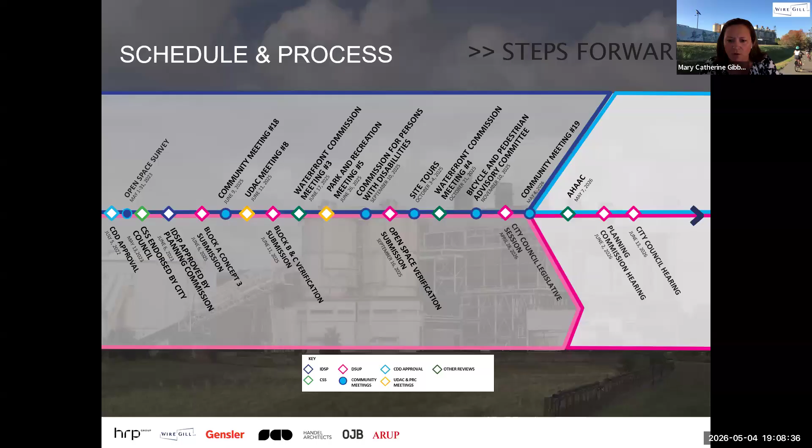And with that, we can turn it over to the questions. We've gotten a number of questions both before the meeting and in the Q&A so far. So we're going to start with a question that's being asked by a number of people. Mary Harris asked it herself, saying it is the most asked question she gets in Old Town North, but it was also asked by several people in the pre-questions: when is the power plant going to be demolished, and when will the site be ready for development?

And so for that timing question, Melissa, I'm going to turn it over to you. Sure, thanks Mary Catherine, and thank you for your questions. There's a lot of great questions here, so we're going to do our best to get to all of them tonight. The answer is 2027. As John Newhall mentioned, we will start the deconstruction by the middle towards the end of next year. I think there's some other questions about what our remaining hurdles are. We do have to go through the final site plan review process with city staff and get building permits. We need building permits, obviously, to go vertical. We'll also need a permit to do the deconstruction. So there's some engineering and permitting work that will happen in the lead up to that. But by the middle or the end of next year, you will see the process all starting. And as John mentioned, we will go from deconstruction straight into vertical development of this first phase, blocks B and C. So I know there have been a lot of people working a long time to see this site redeveloped. A lot of folks in the community want to see it happen, and we're happy to say that it will be starting next year.